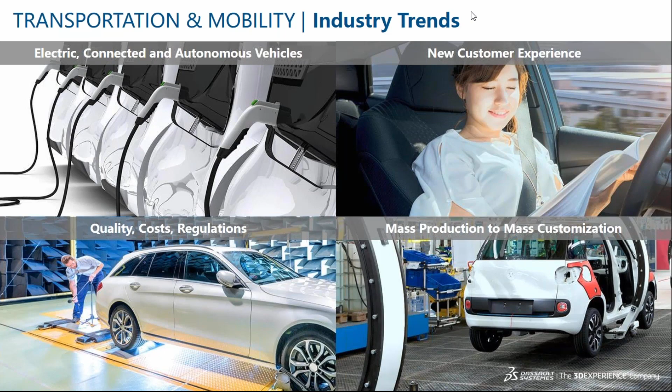At Dassault Systèmes, for each of our solutions, we try to have an approach based on the corporate initiatives which drive our customers. In this case, for the development of innovative powertrain solutions, we have identified with our customers 6 main key business drivers which cover all the possible engineering analyses our customers want to realize: increase safety, increase drive performance, reduce cost, reduce emissions, reduce weight, and increase drive comfort.

And regardless of the kind of powertrain, ICEs, fuel cells, or electric, it's always the same key business drivers. What is changing for each kind of powertrain are the defined objectives to address those business drivers. For example, in the context of electrification, maximize energy density with high energy density electrode materials for increased drive performance, improve NVH behavior of electric vehicles for increased drive comfort, and reduce electromagnetic radiation for increased safety.

And this approach is quite good because it allows us to offer our engineering solution in the form of different workflows and analyses addressing directly the needs of our customers. Our approach is a kind of tailor-made. So I wanted to give you an overview, for the key business driver increased safety, of the different workflows we have defined for this.

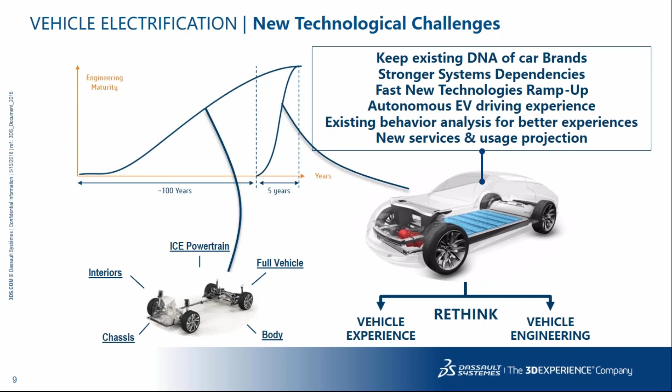The second point we can talk about is the chassis, which will probably be redesigned to fit the requirements of an electric powertrain. Due to a lower center of gravity, the vehicle dynamics have to be analyzed again, and for this we have the right solution, for example, with SIMPACK. One important question at this point is, can I create a chassis concept which I will be able to use for different kinds of powertrain? We know that modularization of such components is currently extremely important for our customers.

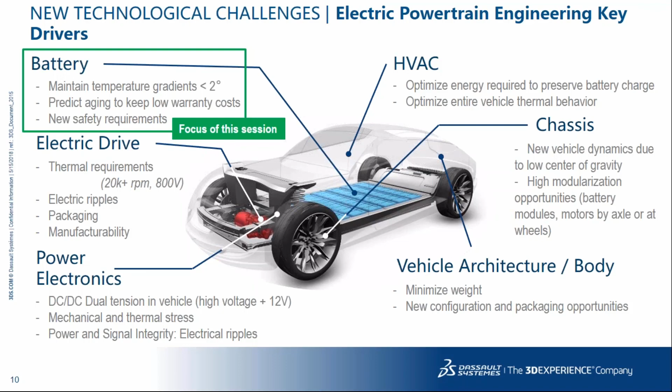Other important components impacted by powertrain electrification are listed on this slide: for example, the vehicle architecture, the body, the power electronic systems, the electric drive, and of course the battery. Today, our focus will be on the battery.

I wanted to give you an overview of the business processes we have defined for this. You can see the different areas we have: for example, electric powertrain system engineering, power electronics, electric drive engineering, full vehicle integration, and battery engineering. Battery engineering is in green because we are going to talk about it, but you can see that we have different business processes for all the kinds of analysis you want to do on an electric vehicle.

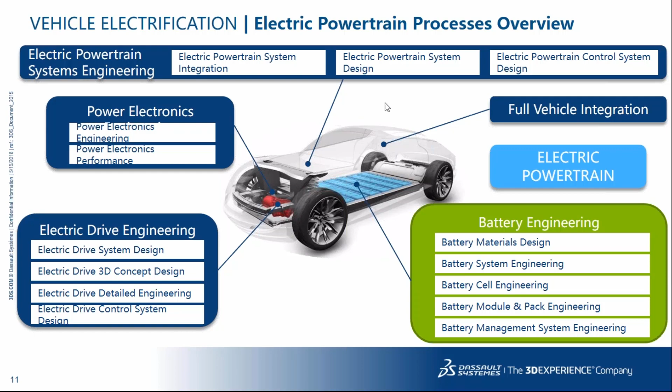Workflows like electrode properties and intercalation, electrolyte characterization, solid electrolyte interphase characterization, and so on. And of course, the goal is to consider the whole as a system, and to use the analysis you can have on the material side for further analysis, for example, on the system design side, on the 3D design side, and performance analysis. That's the different areas you can see.

On the system design area, you can see the different workflows we have, and we're going to talk about this. So for example, electrical behavior modeling, mechanical behavior modeling, thermal behavior modeling, aging behavior modeling, and system analysis, and everything in 1D. On the battery cell engineering, and there we are in 3D, we have different workflows too that are ready to be used at our customers. So for example, physical design definition, electrochemical performance, thermoelectrical losses, thermal management, and so on.

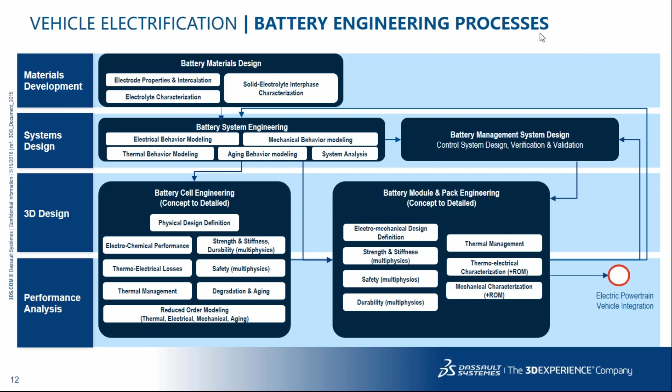And we have the same when we speak about the module and the pack with electro-mechanical design, strength and stiffness, safety, durability, thermal management, and so on. And with that, now we're going to go into the technical deep dive. So Thorsten, if you would like to start with the 1D, with the system engineering presentation, it would be a pleasure to pass over to you.

Yes, can you also give the presentation rights to me? Okay.

Okay, very good. So in the remaining part of the presentation, we want to talk a bit more in detail as to how we solve the challenges on the battery development using the as-defined industry workflows, and taking a glance at the complete picture of the model-based battery development process solution provided by DS. It can be seen as a two-dimensional process.

So two-dimensional means that you have on one side the process along the complete supply chain, starting from the development of the material, subsequently turning that into battery cell technology, developing the needed battery modules, which are then assembled into a complete battery pack and system, and finally integrating that into a complete entire vehicle system architecture. So meaning the whole process going from materials up to the battery system and vehicle level technology.

The other dimension relates to the level of abstraction of the simulation model, so meaning 1D or 3D model, which depends on the development stage, but also the needs of your particular use case scenario. And the whole solution is made up by 3 brands, including CATIA, SIMULIA, and BIOVIA. Of course, the foundation for a solid battery system are the materials of the battery in terms of electrodes, electrolytes, and so forth. The model-based development of the materials is something that can be done using our BIOVIA solutions.

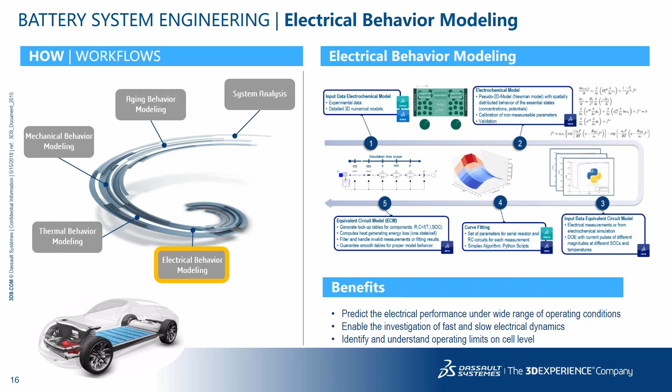So we have two options to get the thermal behavior into that model. Either leveraging a pure 1D thermal simulation in Dymola, where the model gets characterized through measurements or data from a prior 3D FEM simulation, for instance, our SIMULIA products, or we can directly also co-simulate Dymola's electrical model with a 3D thermal model from our SIMULIA products. So an analysis like that facilitates, for instance, to identify thermal hotspots in the battery, which is important to be taken into account for thermal management, but also from a safety point of view.

Another important step is to add the aging capabilities to the overall simulation workflow. And Dymola's battery library covers aging behavior. So the model supports calendaric and cyclic aging, as well as allowing to integrate aging models from external sources, for instance, from suppliers such as cell manufacturers.

So assembling these models now together to a complete battery pack, either the pure 1D model or as a coupled simulation of 1D and 3D models, this system analysis workflow allows the user to simulate a complete battery system, analyze and understand the performance of the battery, and finally validate it against the requirements to further optimize the behavior according to the specific system needs.

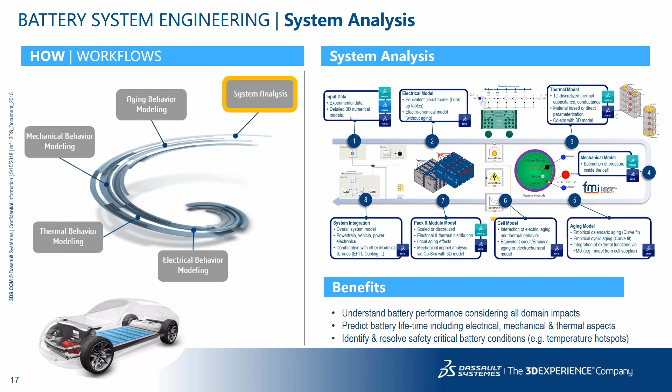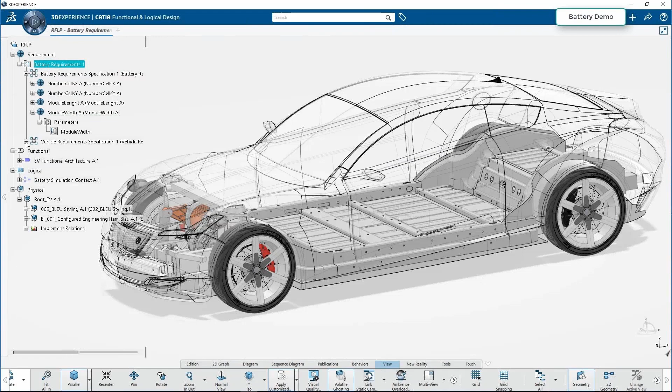Okay, so let's take a look at a quick demo for the system analysis workflow. In this particular use case, we want to optimize a vehicle battery system in terms of vehicle driving range and battery charging time. In order to do so, we've put together a model for an electric vehicle that is associated with a couple of requirements relating to battery requirements as well as requirements for the vehicle. So meaning, for instance, for the battery, the number of cells, and for the car, as a requirement, for instance, the maximum allowable weight.

So let's go down to the CAD model of the overall system. Overall, we have 10 modules in our battery pack. And in order to validate the performance of our system, we have defined so-called advisory checks. Underneath these advisory checks are, at the end of the day, simulations that are being carried out, and we verify the results of our simulation against our requirements.

So we can see here, for instance, 3 requirements that are being verified. One is the driving range, and the other 2 criteria are the battery charging time as well as the battery weight. We can see 2 of our requirements are being satisfied. However, there's one requirement, the driving range, which is at the moment not being satisfied. So it means we have to do some optimization of our vehicle and battery design.

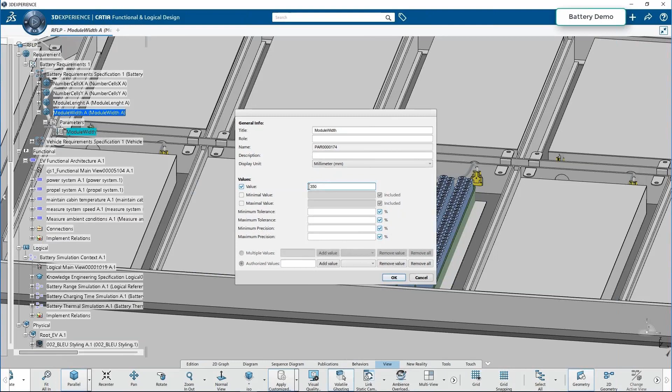In order to do so, we go back to our requirements. What we do is that we adjust the requirement on the module. So meaning we change the size of the module, we change the module width, and what happens in the background automatically in the platform is that the number of cells is being changed and the whole CAD is actually being adjusted. So now we have to also again go back to the simulation in order to verify whether our system now really from a performance perspective meets our requirements.

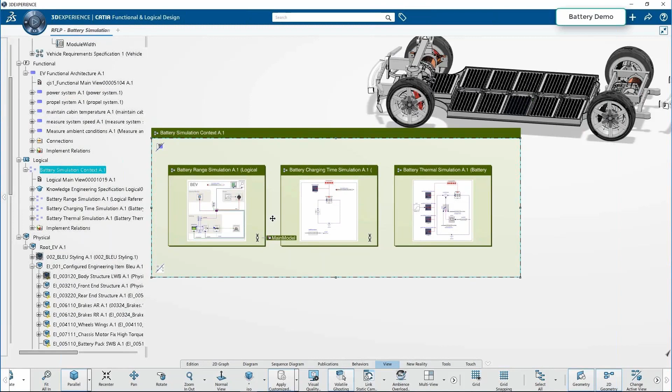In order to do so, we have actually implemented a couple of simulation models in Dymola. One model, for instance, to simulate the driving range behavior, another one to simulate the charging time behavior. First of all, we go to the driving range simulation, open the model in Dymola, and in order to simulate a drive cycle, we need to select a particular drive cycle. In this case, we take the NEDC cycle. Once we have made our selection on the driving cycle, we can launch and kick off the simulation.

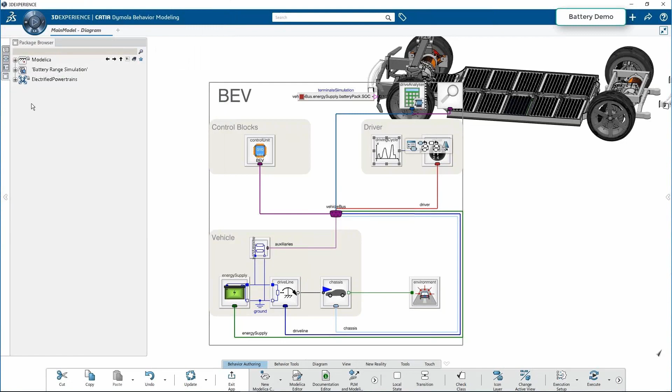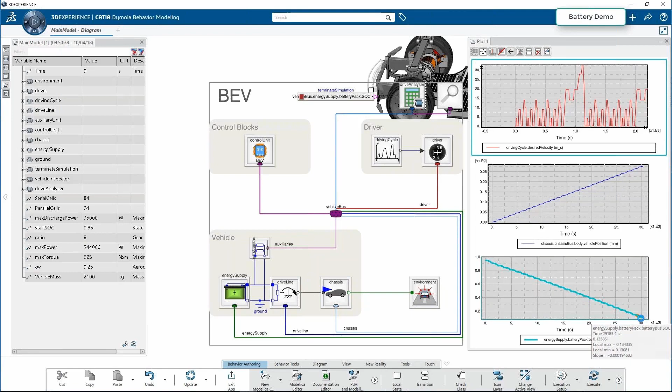So once the simulation has succeeded, we can analyze and review simulation results. For instance, you can see in the lower right corner the state of charge of the battery, and we see that at the end of the driving cycle, we end up with around about 13% SOC of our battery pack. Okay, so that was the first simulation in terms of looking at the driving range behavior after we have made a change in our requirements.

Let's take a look at the charging time behavior. For that, we go again to the other simulation model in Dymola. That's the architecture. Quite simple, a battery model that is being connected to a charging system. Going into the model portrays a bit the architecture of that. This is, for instance, a snapshot of the model of the battery cell, including the thermal part of the model, the electrical behavior of the model, as well as covering the aging part of the battery cell behavior.

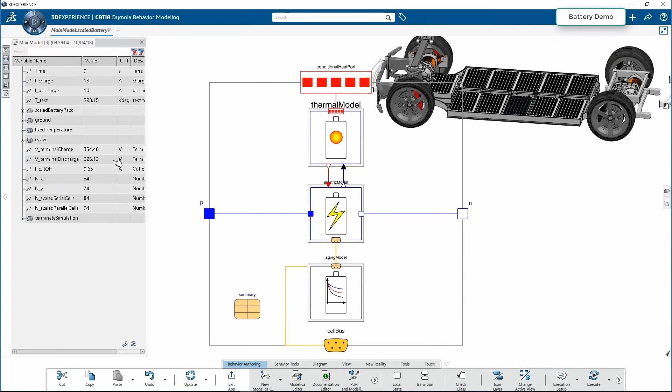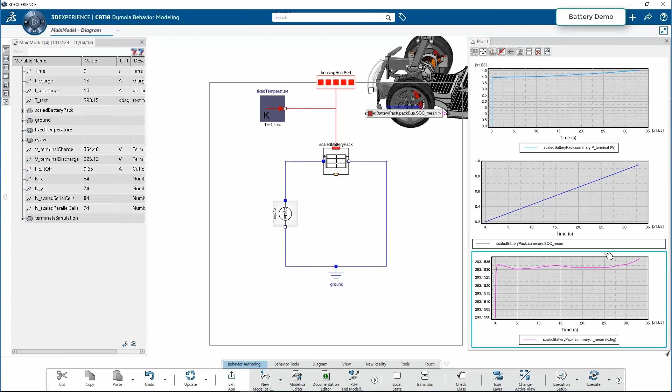So now we have carried out the required simulations for driving range and charging time, and we now update also our life cycle data in order to perform again our advisor checks to double check the performance against the requirements. We can see we have now an improvement here. The driving range as a requirement is now being satisfied with this design update. The battery charging time is also still satisfied.

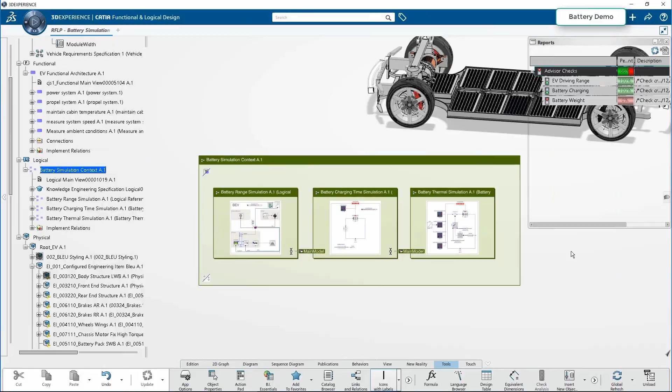However, now the battery weight, and overall also the vehicle weight, is no longer satisfied in terms of a requirement. It comes due to the fact that we have increased the size of the battery module and thus also increased the weight of the battery module. In order to further optimize, it will now require the engineer to take some further measures to improve the performance, in order to finally really address all the requirements.

All right, and with this little demo, I'm at the end of the system engineering part, and I would like to hand over again to my colleague Euriel.

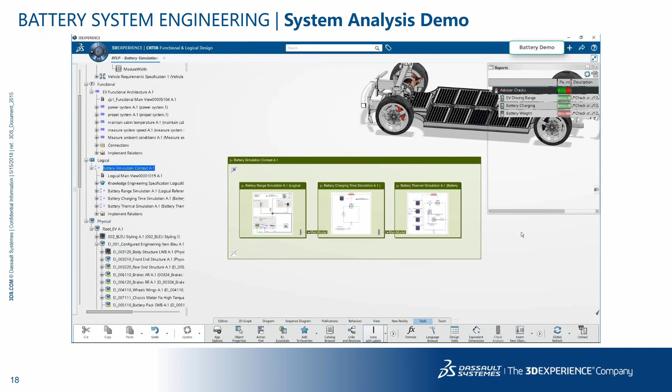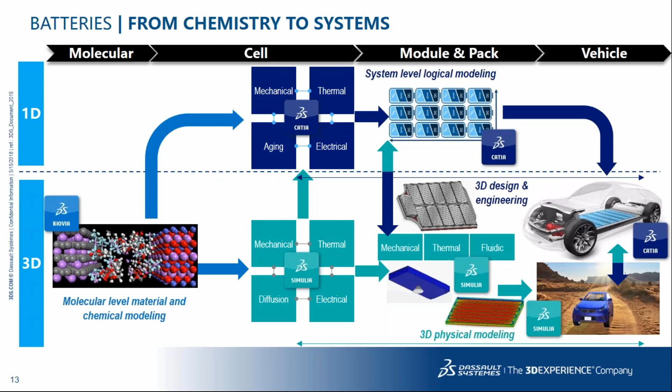So now that we have seen which capabilities we can offer for system engineering, we'll talk a bit more in detail about 3D simulation with Dassault Systèmes solutions. The goal is to realize analyses which are as near as possible to reality and to be able to precisely characterize physical effects everywhere in the geometries.

For this purpose, we will use different Dassault Systèmes technologies which are completely integrated, like the FE solver of Abaqus, implicit and explicit, our CFD capabilities, Navier-Stokes-based technologies, the lattice Boltzmann method with XFlow and Exa, and fe-safe, for example, for fatigue and life cycle analysis. And those 3D simulations will be even better if they are coupled with 1D system analysis to take into account dynamic effects coming from the electrical or the thermal system.

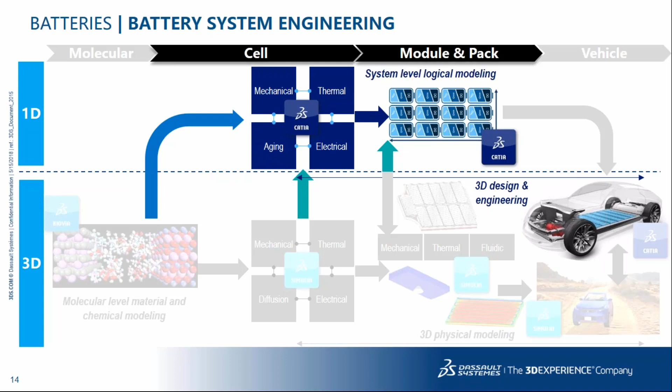Today, our focus will be on the cells and module packs for the numerical simulation, but we could also have presented our workflows for the integration of the battery system in the vehicle, for example. So let's have a look at our solution for 3D simulation of battery cell engineering. On the right side, you can see the different workflows we offer: electrical behavior modeling, thermal behavior modeling, mechanical behavior modeling, aging behavior modeling, and system analysis. On the next slide, we will have a deeper look at the safety topic.

Unfortunately, we won't have the time today to talk about the others, but those workflows are well defined, and it would be a pleasure to discuss them with you if some of them could be interesting for you and your company. On the left side, you will find a kind of summary of the business value of this approach.

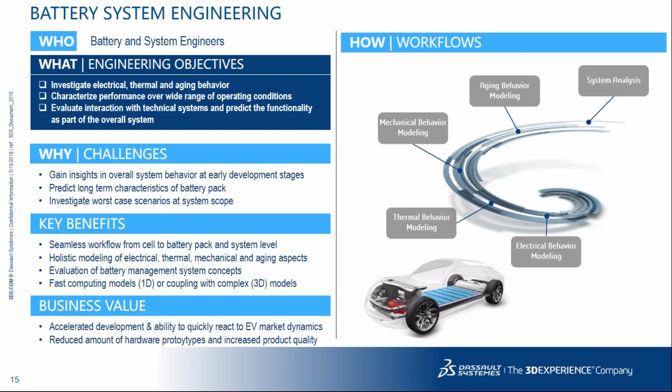So when we have a look at the safety workflow, the first step is to use a CAD model coming from Dassault Systèmes tools like CATIA or SolidWorks, or coming from a third-party CAD. We also feed the system with information about material properties and possibly physical test data, and we can start with the first analysis.

We could start, for example, with structural analysis relative to mechanical abuse events like excessive loads, unwanted large deformation, and predefined scenarios like a crash or nail penetration. Effects on the casing like plastic deformation or even fracture could also be taken into account and applied to the cells. Second step, based on what happens on the mechanical side, we will be able to directly use the output of such analysis to move forward with a short circuit study.

Will cell components get in contact and generate a short circuit? Do I face a tearing problem with the separator? Do I risk electrolyte leaking? Will the mechanical abuse cause a short circuit and a thermal runaway process to begin? Those are the questions we would like to answer with step 2.

Step 3 deals with thermoelectrical abuse and the different factors which are listed there. Overcharge, so for example, problems at the cathode, oxygen release and pressure buildup and so on. But also over-discharge, external short circuit, overheating and so on. These factors could act as a kind of catalyst of a beginning thermal runaway process, and it brings us to the last point, step 4.

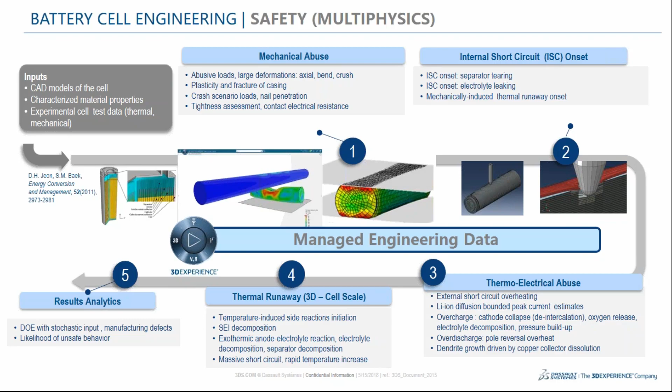What is the business value of this approach? So the business value is to identify the best heating and cooling strategies to guarantee optimized operation temperatures, analyze thermal and mechanical strategies, for example, thermal expansion, plastic strain, susceptibility to cracking, fracture, defects, and so on, in order to ensure that the system won't fail and will last over a large number of cycles. And of course, the last point is to better understand and reduce the impact of abusive events like a collision.

So our thermal management workflow for the battery pack engineering starts with the input of the available data, so CAD data for the module and pack, characterized material properties, and the experimental cell test data if they are available. We will first calculate the heat losses in the system using the electrical behavior coming from Dymola and computing energy losses in each cell via 1D or 3D modeling techniques. We will also assess losses in bus bars and in the equivalent circuit models and apply them in the 3D models to obtain temperature distribution information in the system depending on the operating conditions.

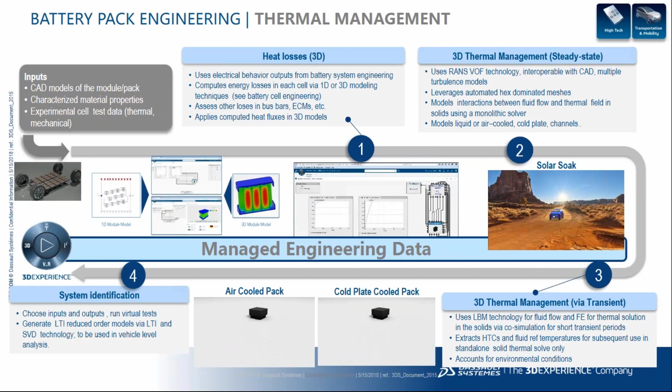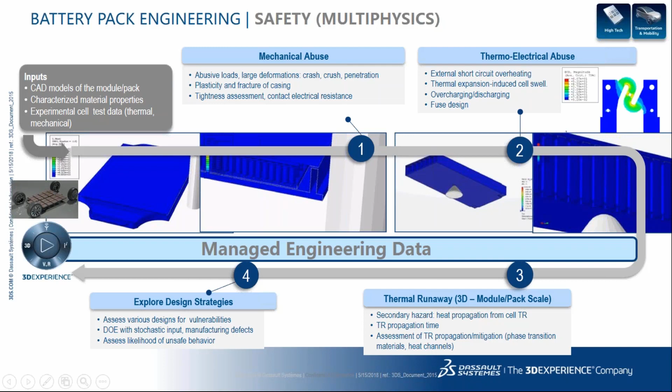And finally, once we have characterized the thermal runaway processes, we'll be able, with the help of parameter studies and design exploration analysis, to assess a lot of different design scenarios in order to drastically reduce the safety risk we could have. So those were the workflows I wanted to show you. It was about the numerical simulation in 3D. As you have seen in the presentation, we have a lot of different workflows. It was just 3 of them.